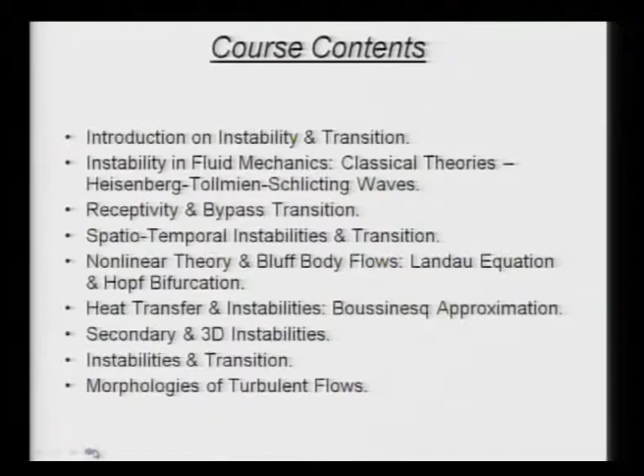The historical introduction we've been discussing: following the experimental observation of Reynolds, which was triggered by Stokes' observation that he could not get pipe flow calculations to match experiments, Reynolds in his pipe flow experiments showed that small ambient disturbances actually magnify, leading the settled laminar flow to go from laminar state to turbulent state. The whole idea of that experiment will be revealed to us later.

Let us now talk about the other aspects: the whole stability study was started with the mistaken belief that viscous action, if present, only damps the disturbances. This was essentially the idea of Kelvin and Rayleigh. This was settled after a lot of jousting between various groups from Germany and continental Europe and the UK, and finally settled by experimental observations at NBS Washington by Dryden's group.

We concluded that it established the existence of wavy disturbance flow at the onset, which we called Heisenberg-Tollmien-Schlichting waves, or HTS waves, obtained by linearized stability theory for a parallel flow. That is the catch.

However, when the same theory was applied to pipe flow, channel flow and Couette flows, it was seen that these are unconditionally stable for all parameter values. So people started looking at alternate explanations, suspecting this could be due to the nonlinearity of the instability regime, or that we had used the assumption that the streamlines are parallel.

That could be at fault. So basically we have to include the growth of the boundary layer into account - that is what we mean by non-parallelism - and of course, we may have some other unknown mechanisms.

What he observed was that the flow itself has a property called receptivity - it is receptive to certain classes of disturbances, not receptive to all kinds of disturbances. So receptivity is what was proposed, as opposed to the general theory of stability, which is posed as an eigenvalue problem.

In all eigenvalue problems, you do not need to define what the disturbance is - you have a homogeneous differential equation and homogeneous boundary conditions. So you have no way of putting in the information that there is some definitive input. This is the beginning of a dynamical approach to the study of stability through receptivity analysis.

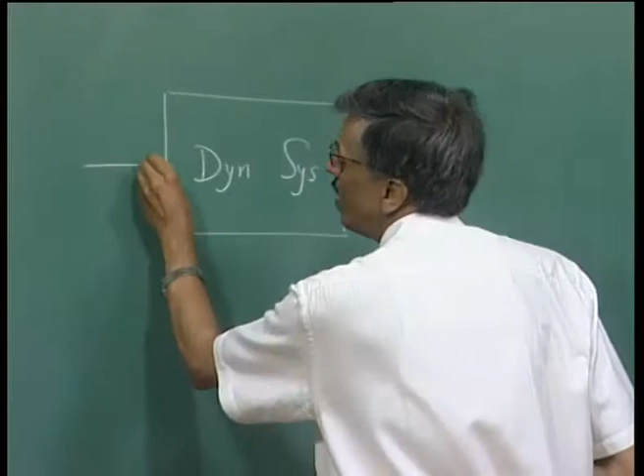In receptivity analysis, what you do is look at the dynamical system acted upon by some input, which leads to observable outputs. Receptivity is the property of this dynamical system.

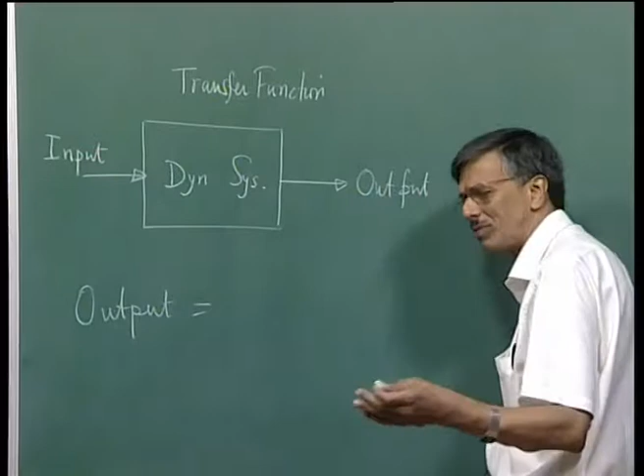Receptivity is the property of the dynamical system, and this property is what we call the transfer function. In a sense, the output is nothing but a convolution of the transfer function times the input.

This is important, because as long as we cannot include what is causing the perceptible disturbances, the picture remains incomplete, and this is what Morkovin was suggesting we should talk about.

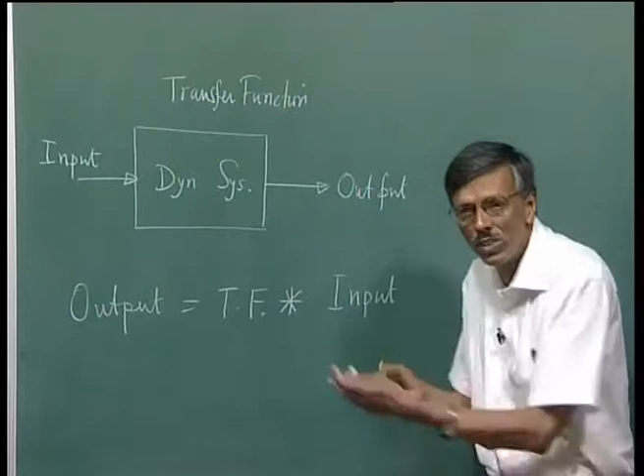So if this transfer function is not receptive to that class of disturbances, then even in the presence of that input, nothing is going to happen. This is rather important, because when Schubauer and Skramstad in their tunnel experiment tried to excite those waves by acoustics, they were not successful.

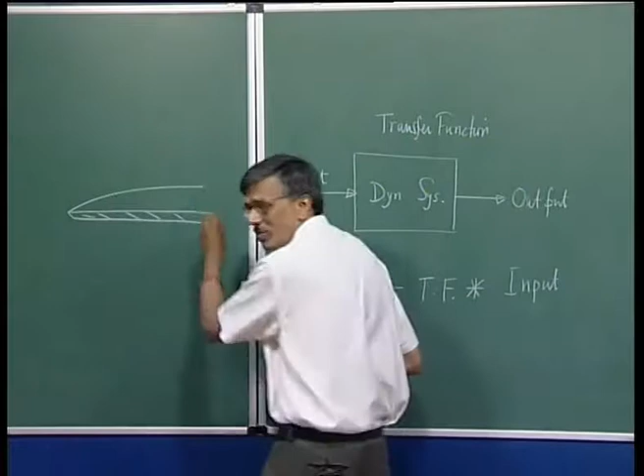Then they used a kind of vibrating ribbon. What they did was the following: if you have a flow past a flat plate, the boundary layer grows like this, and they put in a vibrating ribbon close to the boundary, then started vibrating it. This is what you may call the vibrating ribbon.

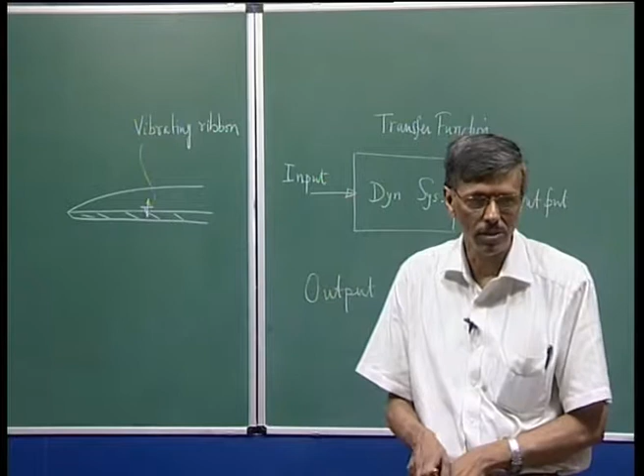This was made of bronze, and it vibrated at a specific frequency, which was actually used in Tollmien and Schlichting's calculation. We talked about in the last class that G.I. Taylor also wanted to do some experiments. What G.I. Taylor did was this: you have a plate, and then you put in a kind of a vibrating bump.

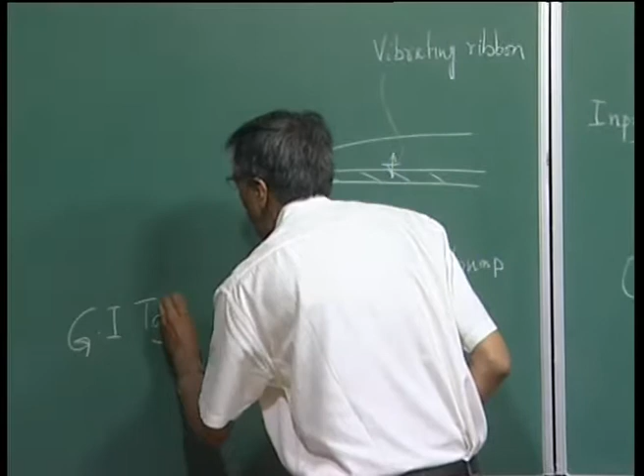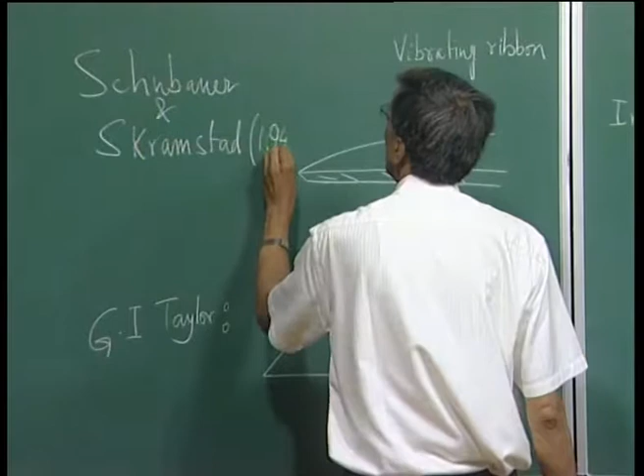This is like a circular patch, flexible, which goes up and down, and this was the experiment conducted by G.I. Taylor in the 30s, early to mid 30s. And this was the experiment done by Schubauer and Skramstad. This was published in 1947, but it was done long time before. It remained classified during the war years, and it got published afterwards.

So this vibrating ribbon was excited at frequencies of, let us say, 50 to a few hundred hertz, whereas in this case, this was vibrated at 2 to 5 hertz. So this could not produce a Tollmien-Schlichting wave, but this could.

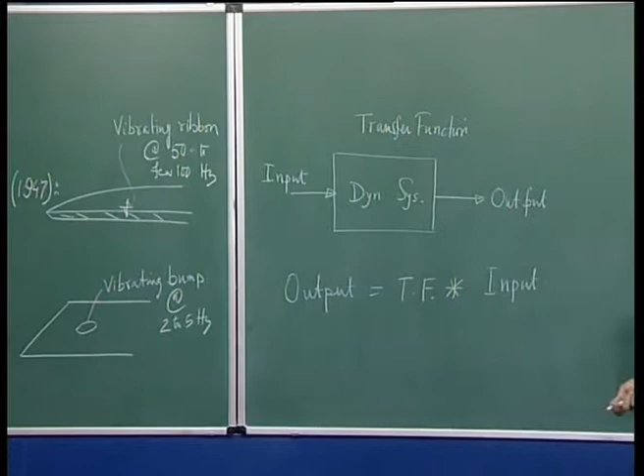The reason is the eigenvalue calculations of Schlichting did show that the flow is not receptive at low frequencies of this kind, but they are indeed receptive to this frequency, and this was something that one needs to do. In experiments, you just do not simply do a qualitative experiment and then make a value judgment.

So we understand. Although I must tell you that G.I. Taylor was an outstanding fluid dynamicist of his time. It is said that he never took any sponsored project. He used to do science for its own sake, using his own money and resource, and he was a professor at Cambridge. So he never did any sponsored research. He used to do it for the love of the subject, but at the same time, even a person of that caliber can sometimes take a wrong step, and here is an example.

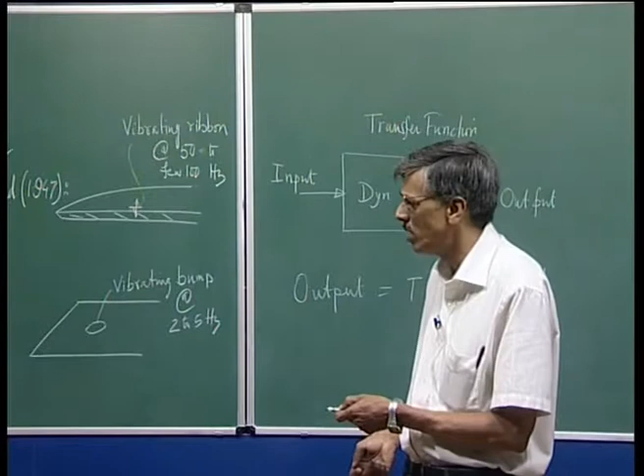So this was something that was very good, that Morkovin suggested that we should look at the receptivity approach. So we need to understand the transfer function very clearly. Stability theory only looks at the transfer function, whereas receptivity studies look at the full thing, because that also includes the information of the input.

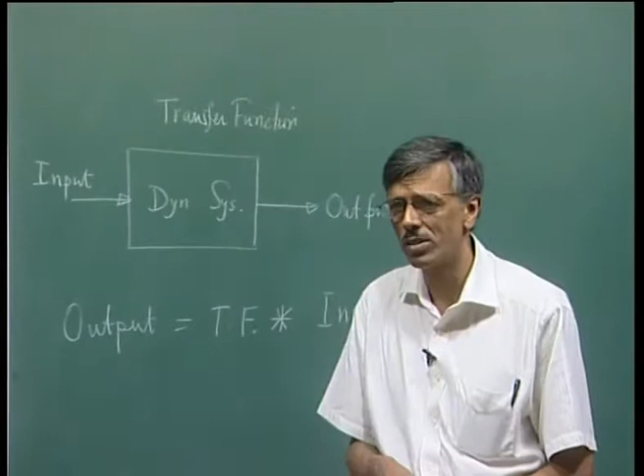We mentioned that there were some flows, like Couette flows, pipe flows, which do not show linear instability. So what happened is some researchers commented that those flows actually undergo transition because they suffer transient energy growth via some modes, which they call non-normal. We will go through these details.

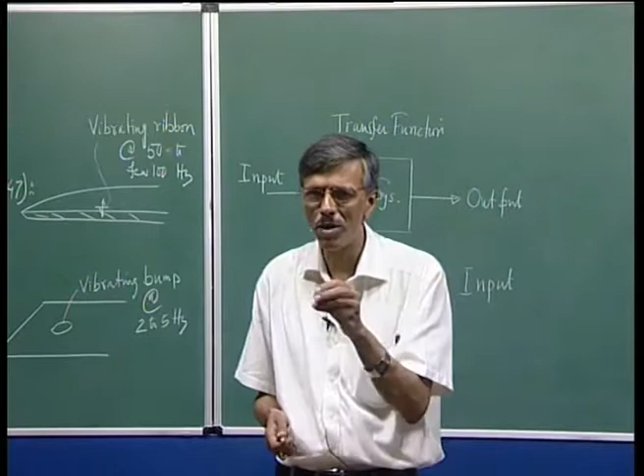The eigenvalue analysis looks at one frequency or one wave number at a time. So those individual frequencies or wave numbers are called normal modes. So here these people are talking about some kind of energy growth, not growing like a wave, but growing in time, okay? And that is transient. It just grows and then it is not there.

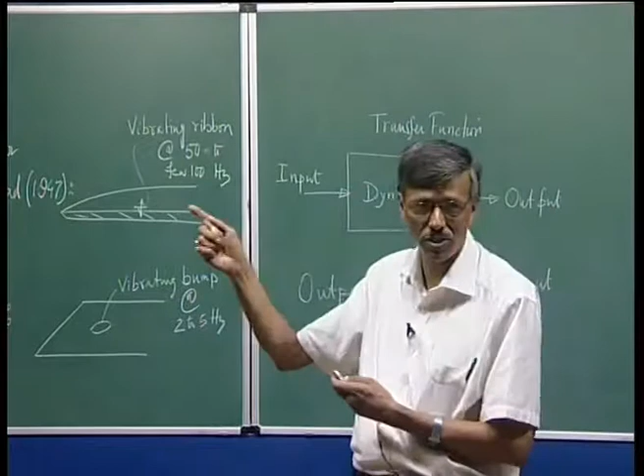I mean, it directly takes the flow from laminar to turbulent state. So it is not like a gradual growth that you associate with the Heisenberg-Tollmien-Schlichting wave transition route. Maybe this is an attempt to explain one particular type of bypass transition. We define bypass transition as that transition which bypasses the wave and its growth. So this was that, and this is the view proposed by Trefethen and his colleagues in this paper.

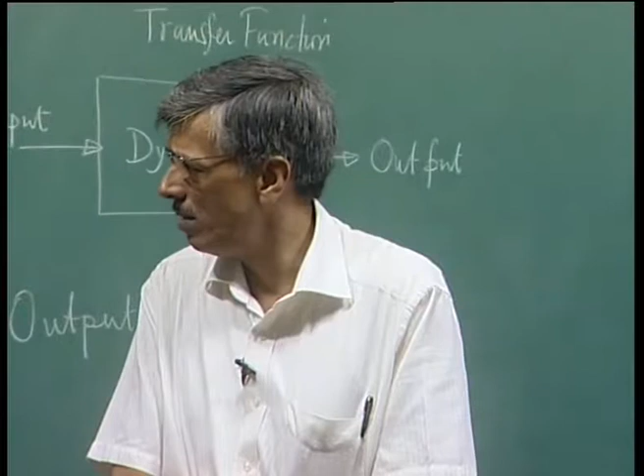And there were other attempts by Landahl, where he and his colleagues talked about algebraic growth of disturbances and interaction of different types of instability modes, etc. We'll talk about this.

Now, we also note that some researchers identify that you get fully developed turbulent flow due to some kind of self-sustained instabilities. Means what? You do not have to do anything, it will just become unstable, it will grow, become turbulent, then it may decay, but then again another set of disturbances will pick up. So that process is self-sustained. And they said that during this process you create some kind of distinct structure, which has been called coherent structure. It is like, think of eddies, vortices. So they are talking about some vortices or eddies forming, and those are what are called the coherent structures. They have been seen actually in various experiments.

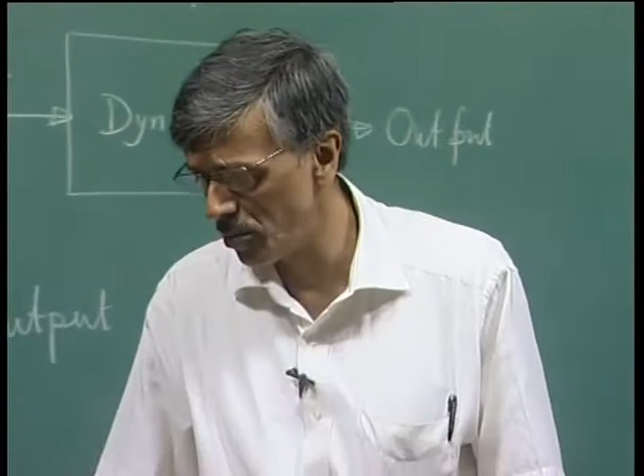Some theoretical analysis done by proper orthogonal decomposition or wavelet analysis also shows presence of coherent structures. So this is precisely the status now. We are in a time where we see there are possibilities that transition takes place through growth of waves, or you can have bypass transition, and bypass transition is basically a basket—it has many routes. We have talked about a couple of them: one was transient energy growth, another was algebraic growth of disturbances. There could be multiple instability modes interacting, and those also need not necessarily show you waves.

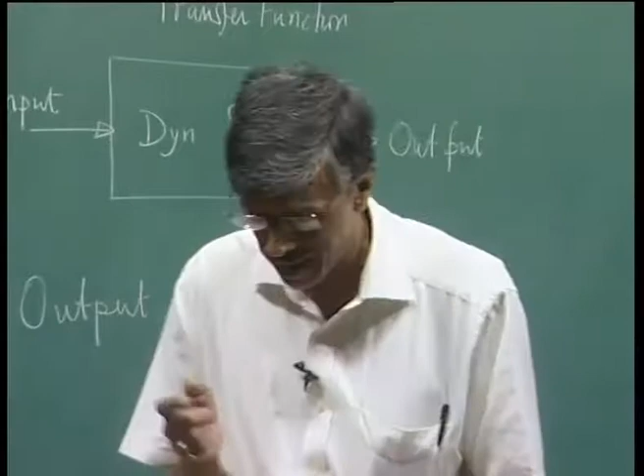But let me add at this point that this experiment we talked about was a very specially designed experiment, and this ribbon was excited at a fixed frequency. So what are we doing? We are creating a monochromatic wave, and we see some kind of waves that grow downstream.

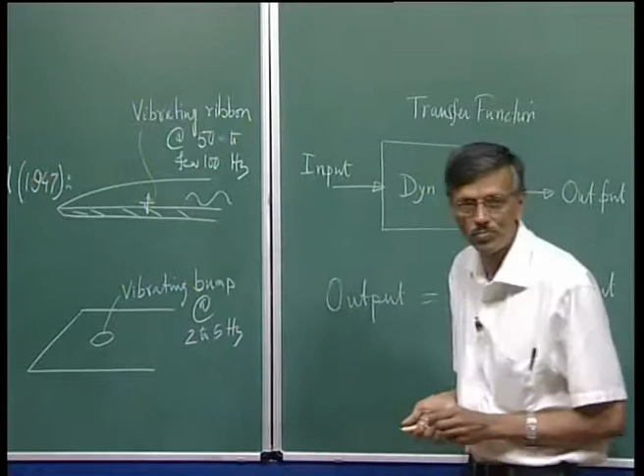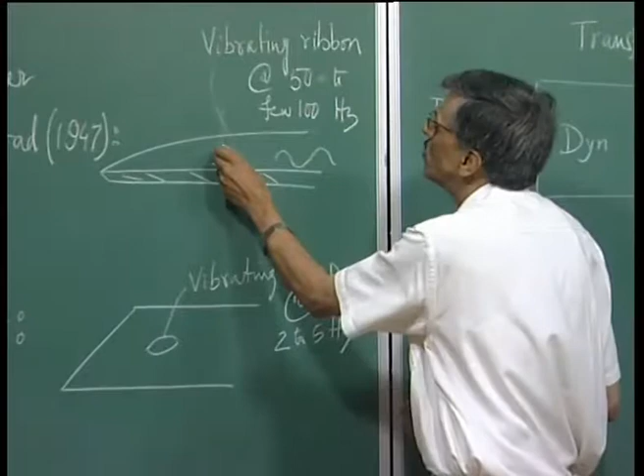Now, what happens in the immediate vicinity of the exciter was not talked about a great deal before the 1990s. People used to think that is not important. Even in some books or monographs, they erroneously show as if there is nothing up to here, and all of a sudden you start getting finite waves growing. That is a wrong picture. In fluid flow, especially at low speed, you cannot have such discontinuities—you will see it has to be a smoothly growing solution.

In fact, when we first did all these receptivity calculations, we identified two distinct components of those solutions. One we call the near field, which is in the immediate neighborhood of the exciter where we are exciting the flow, and a far field. In the far field you see those waves, the TS waves we talked about, but in the near field you may see some kind of totally different structure. We will talk about it in greater detail. So this is the picture that we see.

Now let us go through the formal description of the subject through this introduction. What we see as instability in fluid dynamical flows is always there—that is why we say they are ubiquitous, and even today they remain a challenge because we still do not completely understand transition and turbulence. We understand bits and pieces, and we are going to do that. However, we will try to integrate the whole thing together, and as you can see, you have a laminar flow, then a transitional flow, and then a turbulent flow. In this course we will try to go from the laminar flow side to that side.

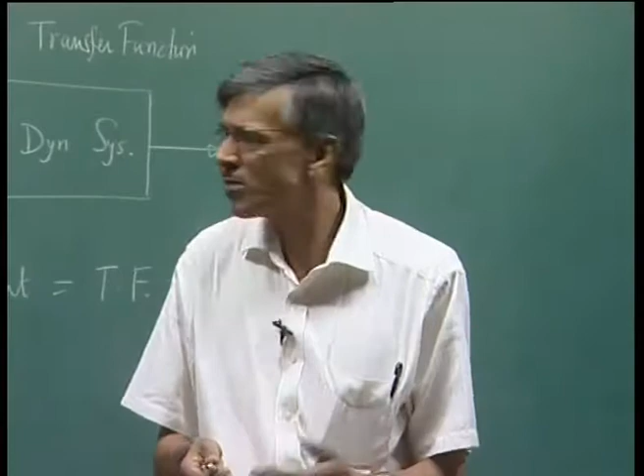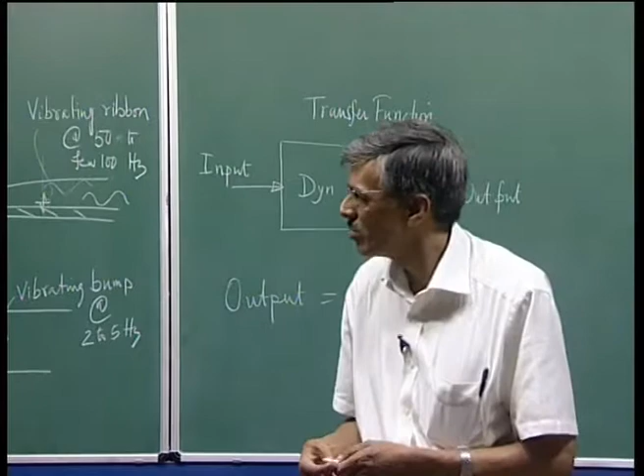We will not put the cart before the horse. We will not talk about turbulence and then make some assumption. Most of the time, people who spend their effort studying turbulence, at the back of their mind, think about some kind of universality of turbulence. What it means is, irrespective of whatever input you have, the eventual output you will get is only one turbulence, one kind of turbulence. Although they describe it not in a deterministic manner but in a stochastic fashion, they say that even in a stochastic picture you have a universality, which is debatable and which some of us do not agree with. So what we do instead is go from the laminar flow side: first it becomes unstable in a primary mode, then you could have a secondary instability, then tertiary instability, then nonlinear stages, and then fully blown turbulence. So that is what we are talking about.

So for pure fluid dynamical flow, we are saying instabilities are everywhere, but if you add some additional physical effects into it—for example heat transfer or chemical reaction, as you may see in an engine—those also suffer instabilities, and those instabilities are going to be even more complicated. So we will probably spend some time talking about heat transfer. Chemical reaction we are not going to discuss at all.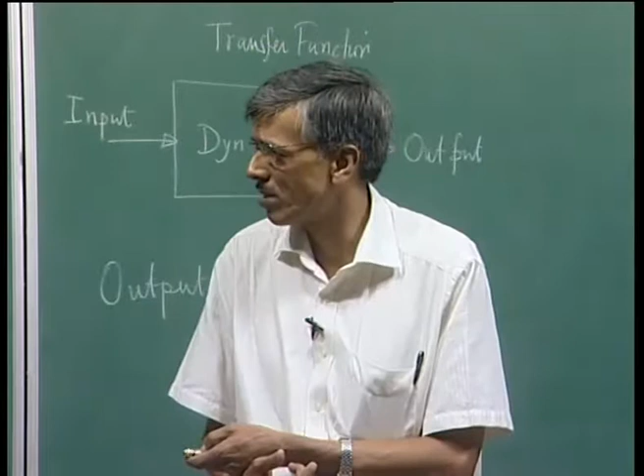And of course, we are going to emphasize various theoretical computational developments. We will talk about experimental results, how experiments have to be designed.

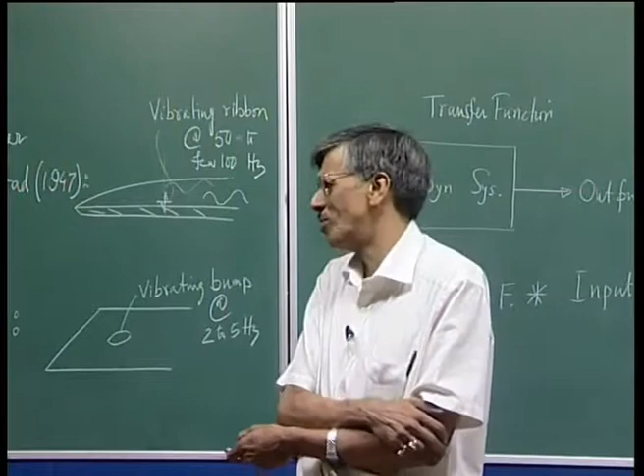Let us talk about one of the applications that should motivate most of you, where this understanding of flow transition is very, very crucial. For example, we are talking about modern day aircraft, where we basically want to keep the flow laminar as long as possible. Why? Because of the reason that if I plot...

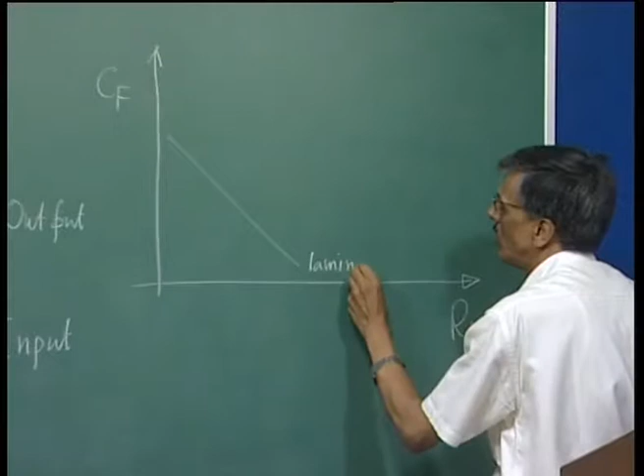Let us say the drag, or one component of it, the skin friction, versus Reynolds number. We know even for flow past a flat plate, the laminar flow, if I do it in a log-log scale, goes like this. So this is the Cf versus Reynolds number for laminar flow, and then depending on the kind of disturbance that you have, it actually goes on to a turbulent branch. So the way the transition process takes place depends on the background disturbances, and it connects like this, it connects like this, depending on different levels of disturbances.

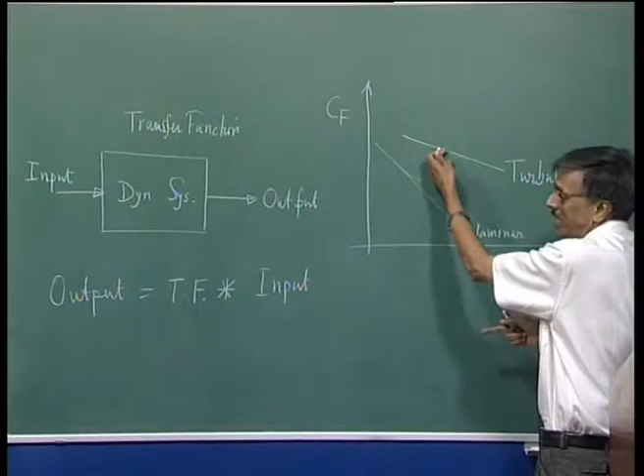That is why the receptivity factor comes in. Where would you continue up to this laminar flow? It depends on how you control the disturbance environment. If you can control it well, then instead of flow becoming turbulent here, you can delay it and it can happen later. And you can see that we are talking about a log scale.

So, if I look at a position, then I can see for laminar flow the skin friction is here, and for the corresponding turbulent flow, if it is fully developed turbulent flow, it is there. This difference is quite significant. We will give you an example - you find that this is significantly higher. So one of the goals for any good aircraft designer would be to keep the flow laminar as far as possible.

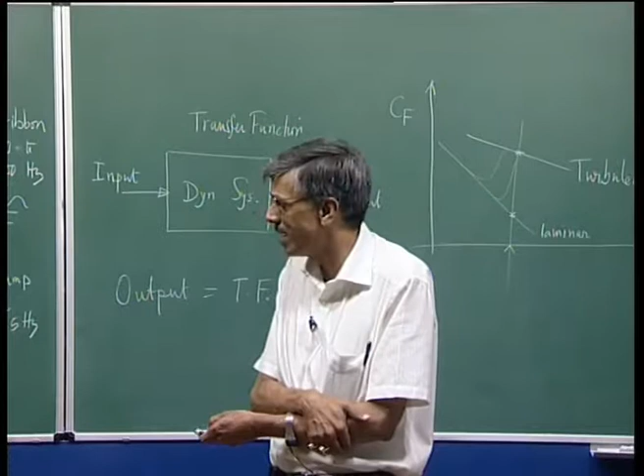And there is a technology which is called natural laminar flow technology, which tries to alter the wing geometry such that you can control the transition process. So those wings are called NLF wings, or natural laminar flow wings, and you understand also that in designing those wings, we are not...

...depending upon active devices. Why not? Because for active devices, if they do not work, then we will be in deep trouble operationally. Think of that you have designed an aircraft thinking the flow will be laminar. So you have put in some engine, and then up there in the sky while it is flying, your active device fails and flow becomes turbulent, and the engine does not have sufficient power. Then your flight is in jeopardy.

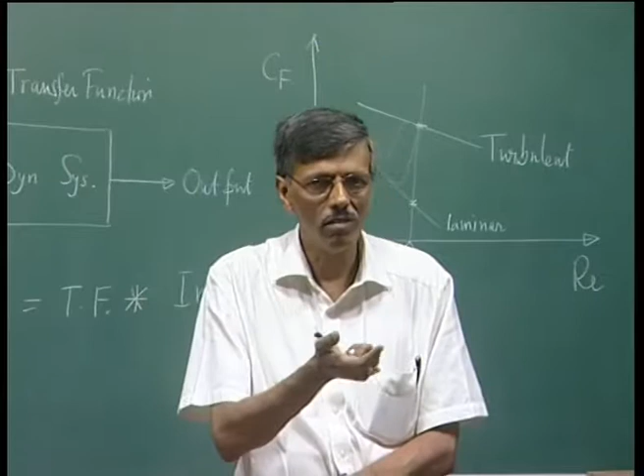And as I told you, apart from the fuselage, most of the aircraft actually experiences drag that is due to skin friction, the viscous action - it is not as much due to the pressure component. We have two components of drag: skin friction drag and pressure drag. It is the fuselage actually that gives a significant amount of pressure drag. I will give you an estimate, so you will see that estimate.

So you can actually think of reducing the wing drag by 10 to 12%, and that is quite significant. Empennages are those control surfaces - the horizontal stabilizer and the vertical stabilizer - they are also wing-like bodies. So you could basically keep the flow laminar over those also. Whatever works in the wing would also work in the horizontal and vertical stabilizer. In addition, you could also keep part of the flow over this nacelle, which houses the engine, laminar, and there you can think of getting a 1% reduction in drag.

It is quite possible to do that, but notice this aircraft's wing is swept back, making some angle with the fuselage direction. Swept back wings are not too amenable for keeping the flow laminar. That becomes better if you have a smaller sweep back angle. That is why many aircraft designers would not like to have the sweep back too large. A rule of thumb is try to keep your sweep back angle less than or equal to 20 degrees. Why do we need sweep back?

Most of these aircrafts fly at about Mach 0.8. So if the aircraft is moving at about Mach 0.8, in some part of the wing you could get a shock. The good news is if you can keep the flow laminar and design the contour in such a way, that also helps in controlling the shock.

Those are called supercritical wings, designed for keeping the shock weak. It so happens that what works for supercriticality also works for natural laminar flow. All these modern aircrafts like A340 or Boeing 757, 767 and higher models, they all have NLF wings, which are also supercritical wings. So you try to push the frontier, go as high as possible in Mach number, and to avoid shock forming, you have to provide the sweep back.

So what matters most is the Mach number normal to the leading edge, not parallel to the fuselage. That is why you sweep it back, so that the Mach number normal to the wing becomes lower. That is the whole idea.

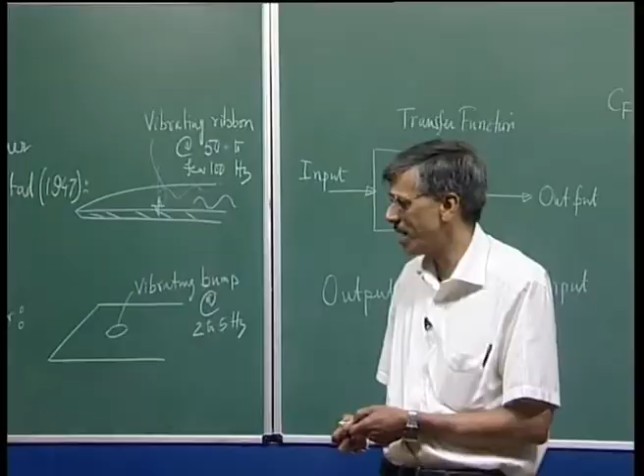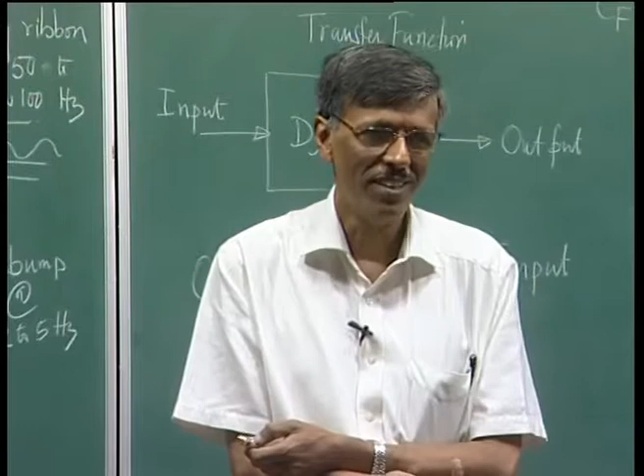Now if you are trying to design a new aircraft, these are the problem areas. Even today, we do not predict transition very well. We simply do not, and even if we do, the predictions are not very reliable. And if prediction is a problem, experiment is virtually impossible, simply because every wind tunnel brings its own signature. You take the same aircraft model and do experiment in two different tunnels, you will find a very disappointing result, because they will be all different.

So this is what we try to keep in mind as we go along. We are going to look at how things work, and this is an example of a beautiful design. I am not very sure if it is still out yet, it was supposed to have been inaugurated this year. This is an aircraft designed by Honda, and unlike any other aircraft, the surface finish of this aircraft is superb. This has happened because the automobile sector has better manufacturing ability than what we do in making airframes. If you come close to an aircraft, you see those rivets and gaps, they look very ugly, and they also actually create a big potential for transition.

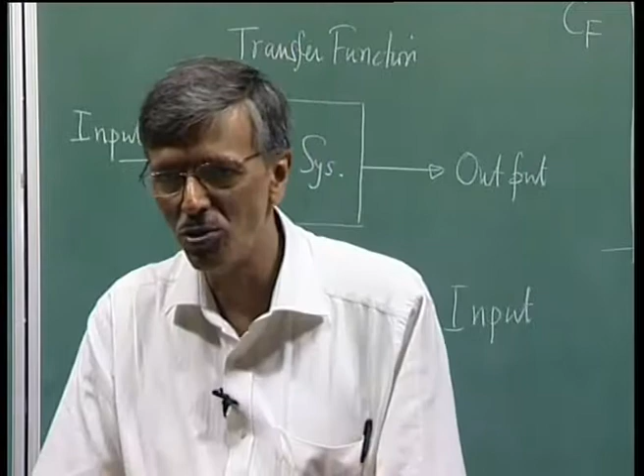Whereas these people have designed the wing as an NLF wing. Honda, I will show you some clip today itself. And not only that, they have also positioned the nacelle with respect to the fuselage in such a way, it is a beautiful design, because if you calculate the drag of the nacelle, calculate the drag of the fuselage, add the two up together, and then go to the tunnel and do the experiment with the fuselage and nacelle together, that total drag is lesser than the sum. So this is what is called synergy in design.

So this is one of the most beautiful aircraft that has been designed. We have studied it to some extent. I will show you some of the work done by Yogesh here, and you will see some of those calculations.

So, you can see it is the fuselage which actually contributes more drag than even the wing. Then the stabilizer gives you a drag of the order of 0.0027, roughly about half of what you get from the wing. So, it is not negligible.

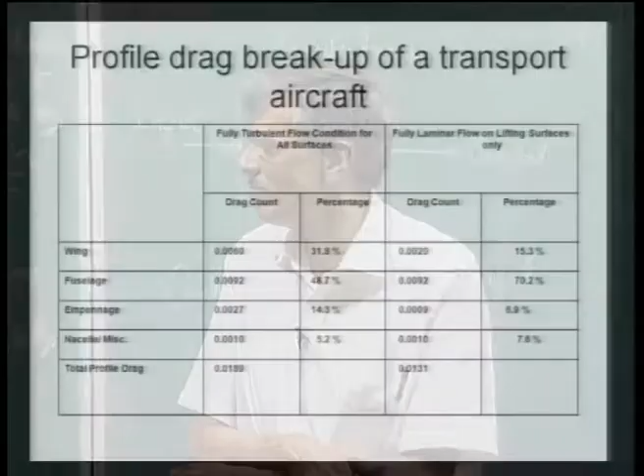Now, if I show you that picture for the Airbus A340, suppose we manage to keep the flow fully laminar on all lifting surfaces, not part - just the wing and the empennages, nothing else. If we can keep that, then you see the drag of the wing would come down from 0.006 to 0.002, that is 1/3 the value, as shown here.

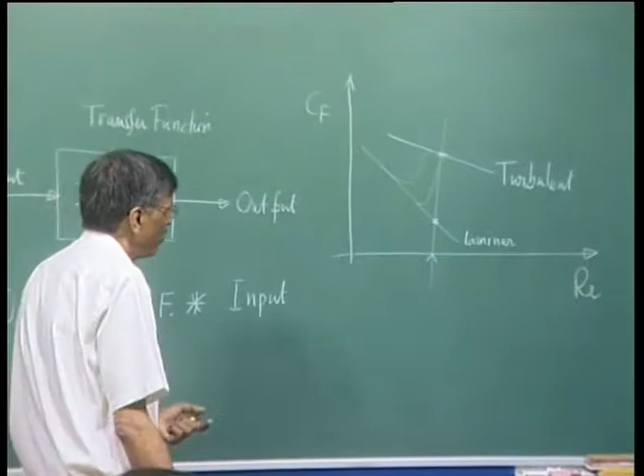Actually this jump for a flat plate is about 5 to 10 times. So you try to keep the flow laminar as far as possible, and further you keep it, you can see the dramatic growth. Suppose it becomes turbulent here, then this differential is not very much, but if you can keep it laminar, you can actually get a very significant reduction in drag. So the drag becomes 1/3 for the wing.

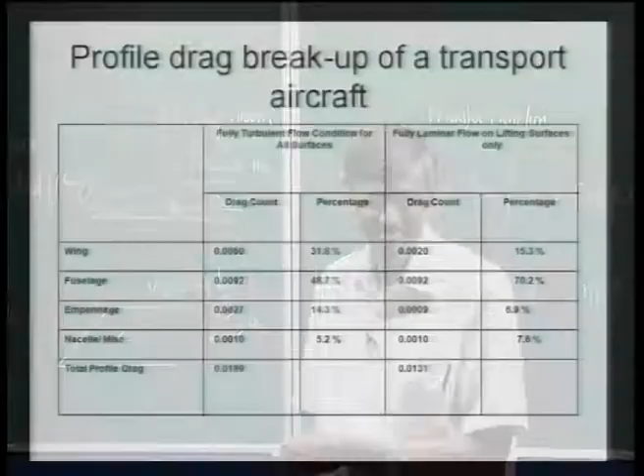Now, the fuselage of course remains the same at 0.0092, and the empennages also become almost 1/3, with other things kept as they are. So you see the drag has reduced from 0.0189 to 0.0131. Now, the wing contributes about 15% of the drag, but the fuselage contribution has gone up to 70%, and the empennages have also come down, and the nacelle has also come down.

However, we have seen in that picture what the current thinking in Europe is, that you are not going to get fully laminar flow over the whole lifting surface, you are going to get part of it. So this is an optimistic picture of what would happen if you could do that.

So let's talk about the flow over a nacelle. Now there also people have done something. You see, what really matters is the pressure gradient in the flow. If I simply take a cylindrical nacelle, its pressure distribution is given like this - you have a suction peak here, and following the suction peak, you have a severe deceleration of the flow.

Adverse pressure gradient is very, very large in this part. That actually triggers transition immediately. So one rule of thumb is avoid adverse pressure gradient as much as possible. If you guys are aware of this NACA 5-digit series and 6-digit series aerofoils, those are designed with this in mind.

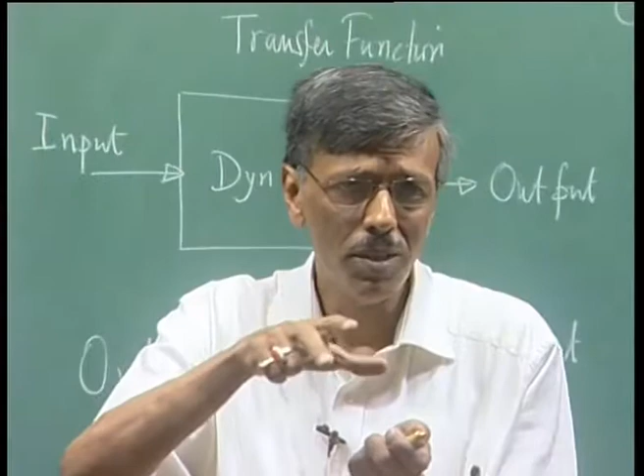They knew you have to keep the flow under favorable pressure gradient as long as possible, and one theme in the development of those aerofoil sections in the 1920s and 30s was to keep the maximum thickness point as aft as possible. They pushed the maximum thickness point to say 35% to 50% and so on. That is the story of 6-digit series aerofoils.

So here also you can do the same thing. Now you can see the contouring - instead of having a flat diameter, now it has been increased, and if you are looking at flow less than Mach number 1, then such a contour would create a flow acceleration up to the maximum thickness point. So you get a very smooth CP distribution as compared to this peaky CP distribution.

So this is one of the ways people have been talking about reduction of drag over the nacelle, and we have already said it accounts for about 5 to 8%. So whatever you get, it is good enough. Somebody said sometime ago that if you can reduce drag by 1%, the operational cost comes down by a few billion dollars.

We just saw that for an aircraft like Airbus, people are talking about some amount of drag reduction by promoting laminar flow, but we also saw the Honda Jet, which looks gleaming and which has a very fantastic drag polar, which is very good.

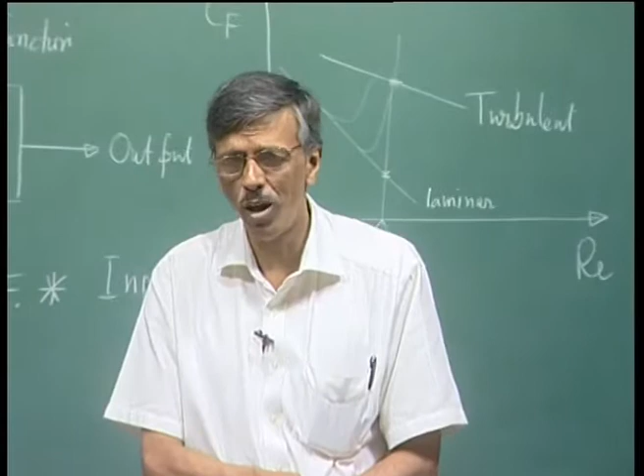I told you about surface finish. Now, surface finish is not something that you only see with your naked eyes. Sometimes you would also worry about the roughness, which you can only measure using profilometers. So, the effect of even small scale roughness could be very profound, and people have known about it, and this effect of roughness is a function of Reynolds number.

You see all those NACA 6-digit series aerofoils which are designed, they somehow work for gliders, but they do not work for powered aircraft. Why? Because unpowered aircraft go at a smaller speed, so Reynolds numbers are lower, of the order of a few hundred thousand, whereas if you look at that business jet we saw, Honda Jet, the cruise Reynolds number is something like 10.3 million. The aircraft in our flight lab would also have a cruise Reynolds number of the order of a few millions, if not 10.

So, at those high Reynolds numbers, the small roughnesses act like an amplifier. They really promote turbulence. So, the effect of roughness on airfoil section is quite well known. That is why 6-digit series aerofoils are not used in any commercial aircraft that you would see. They have major effects on lift, drag and bypass transition near the trailing edge.

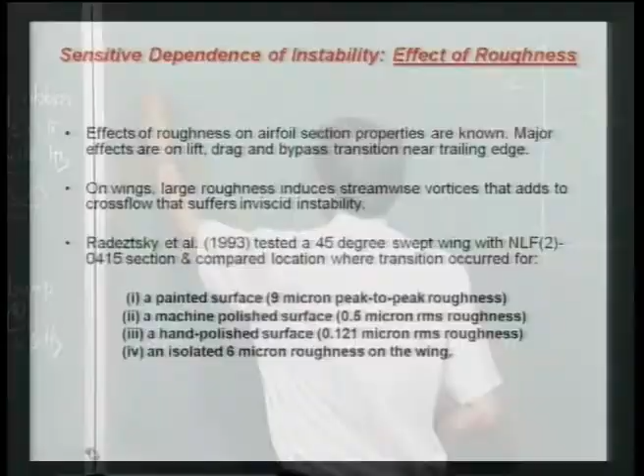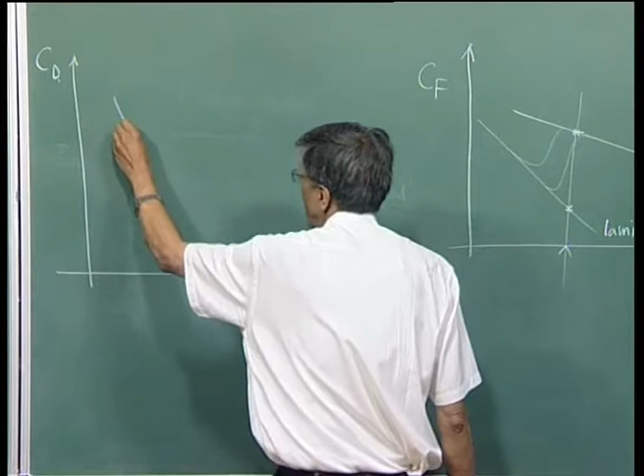Let me tell you somewhat about the property of these natural laminar flow aerofoils. They have the following property: if I plot the section property, I will plot non-dimensional lift coefficient on this side, and on this side I will plot the non-dimensional drag coefficient, and these NLF aerofoils, or the 6-digit series aerofoils designed in the 20s and 30s, have the following type of properties.

So, what happens is you design it for, say, a point here. So, this is your design point. At the design point, your drag is quite nice. This could be your cruise configuration, but suppose when you are landing or taking off, or if there is some other off-design condition, you can see that if you are here, then this drag and this drag are quite different, and roughness actually changes this curve altogether.

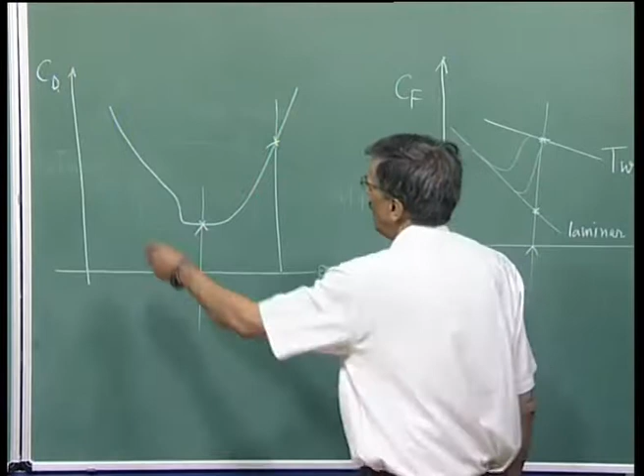If you have roughness, you could see that this could actually go like this. So, this is what is called a drag bucket. Most of those 6-digit series aerofoils have a drag bucket; the drag polar looks like a bucket. So, if you are working in this region, it is all very fine. Outside that region, drag increases very, very badly. So, that is why it was done.

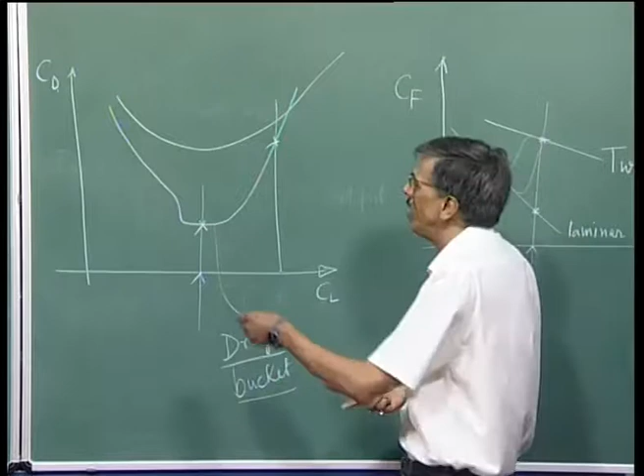Whereas the modern day NLF aerofoils would be somewhat something like this. So, it is not a single point design, it is a multi point design. You try to design it not only for cruise configuration, but also for, let us say, landing and takeoff and so on. However, we have seen that this rapid increase in drag is contributed by roughness for those 6-digit series aerofoils.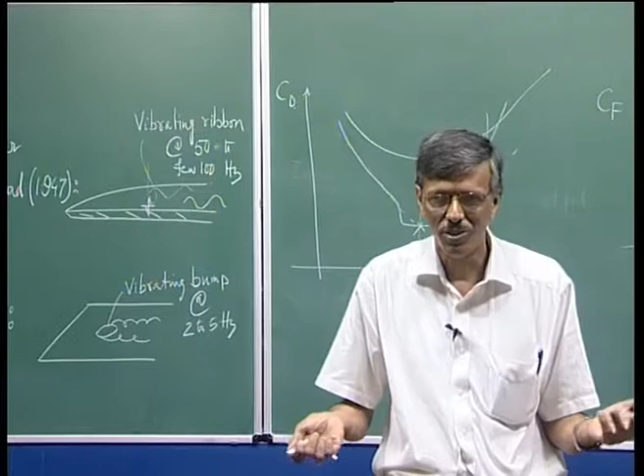And what it actually does, this roughness element, where it sits, it is almost like a bump, and it creates some kind of streamwise vortices - vortices which are like helical structures in the streamwise direction. These streamwise vortices actually create an instability called the cross flow instability, and it is basically inviscid in nature. So, you have no way of controlling it. Inviscid mechanisms - these vortices create some kind of inviscid instability, and they are going to trigger transition immediately. So, that is why you try to avoid having roughnesses.

This was investigated by a group, Radeztsky and his co-authors, who actually tested a 45 degree swept wing with a particular natural laminar flow section. This is what is called the general aviation wing, GAW wing, with the number code 0415. This is a 15% thick aerofoil, and they compared the location where transition occurred for the following four cases. You take a painted surface.

One would probably think painting makes the surface smoother, but despite that, if you look at peak to peak roughness height, it is of the order of 9 micron. 9 micron is not too large, but even from a transition point of view they could be disastrous.

Now, you could also machine polish the surface. You can bring down the peak to peak roughness from 9 micron to 0.5 micron RMS value. So you can bring it down, but what works best is the individual ability to do it by hand.

A hand polished surface actually brings down the roughness height to even lower values. And they also studied something like a bump, a 6 micron isolated roughness element. And what you would notice is...

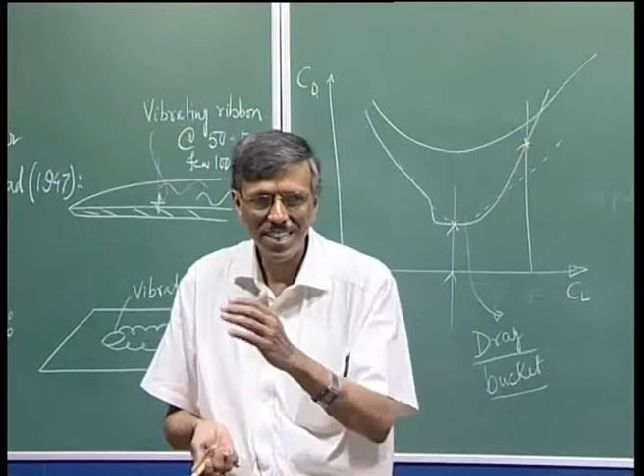So you can see these three are somewhat different, and although there is a problem with hand polishing, you can polish it better where the curvature is less. If you try to look near the stagnation point, near the leading edge, the polishing may not be as good. It would be slightly degraded, but still better than machine polishing.

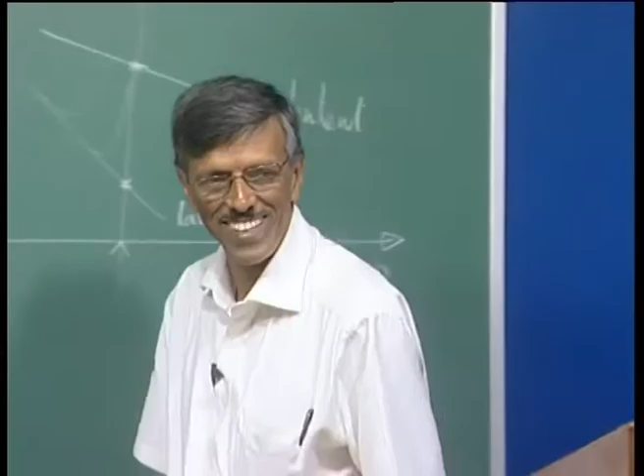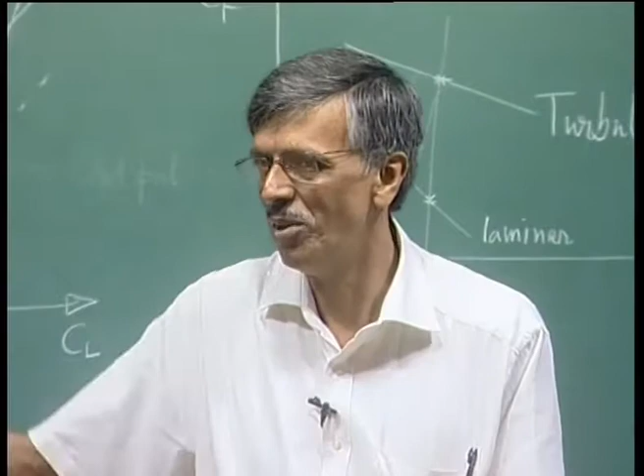And what do we do when we do calculations? We always calculate uniform flow past a smooth surface. So you understand why we do not do so well when it comes to computing also, because we do not have the wherewithal to put this input into our computations. Surely some of us try to do it, but the rest, especially commercial packages, have no way of really even comprehending this problem.

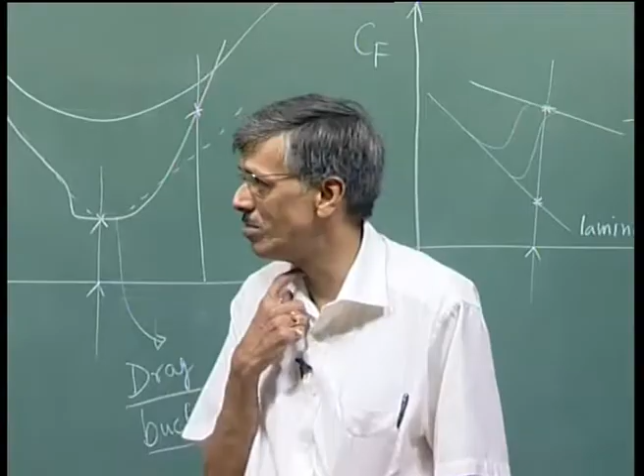Okay, so we understand what it is. So if I summarize the effect of roughness: isolated roughness, like what we have shown here, induces a 3-dimensional effect via streamwise vorticity, and the streamwise vortices create an inviscid instability. You can prevent transition occurring early via cross flow instability if you remove this isolated roughness by proper surface finish.

And hand polishing can really create surface finish up to 0.1 micron near the mid chord region, and 0.25 near the attachment line. Attachment line is near the leading edge - there you have a curved surface, you cannot do better than that.

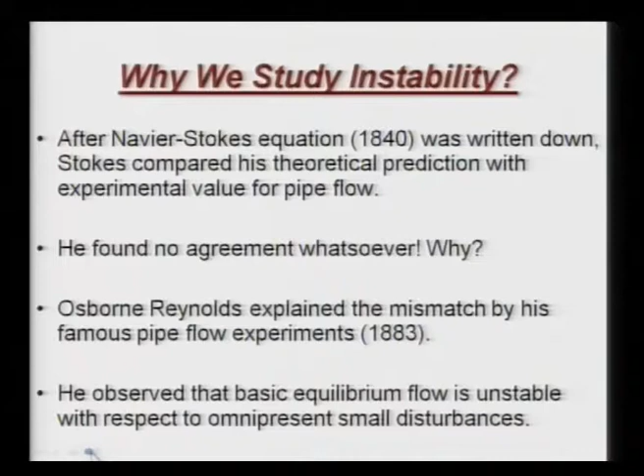Now, why do we study this? We have talked enough about it, so we know what we are talking about. But here I want to show you what Osborne Reynolds did. Osborne Reynolds performed his famous pipe flow experiments. He noticed that the basic equilibrium flow is unstable with respect to background disturbances. So let us see what he did in his experiment.

This is a sketch of his experimental facility, probably taken from some museum where it is displayed. And this is the pipe in the middle. I will show you a better sketch later, but do understand the pipe is here. The pipe entrance is through this bell mouth, so the bell mouth is visible.

And at the center of the bell mouth a dye is injected - this is where the dye is kept on top. And what happens is one notices the following scenario, sketched here on the right hand side: if the flow was completely laminar, the dye injected in the center would remain and go through the pipe.

But what actually happens is something like this: it remains laminar, then it breaks down to turbulent flow very rapidly, and this dye gets mixed up with the surrounding fluid. That is a signature of turbulence, the chaotic nature of the flow.

Sometimes, if you take some care, you do not immediately go to fully developed turbulent flow. Instead, you get something like this—these are called puffs, or slugs. You get a puff of disturbances going, like a smoke ring kind of thing that goes one after the other, and this is what you actually see in the experiment.

So this is what happens: in laminar flow, the dye does not diffuse, but if it becomes turbulent, you get this other behavior. Here is a case where the transition has occurred rapidly, and here it happens in a more delayed manner. So this part of the flow, starting from here till the end, we call transitional flow. This was the famous experiment.

If we recall what we see in the textbooks, it says that if you have a Reynolds number up to around 2300 or so, you can keep the flow laminar. Anything largely in excess of that Reynolds number, the flow becomes turbulent.

We have seen in the experiment of Reynolds that he could keep the flow laminar for a Reynolds number of 12,830, and he had to do all kinds of things to achieve that.

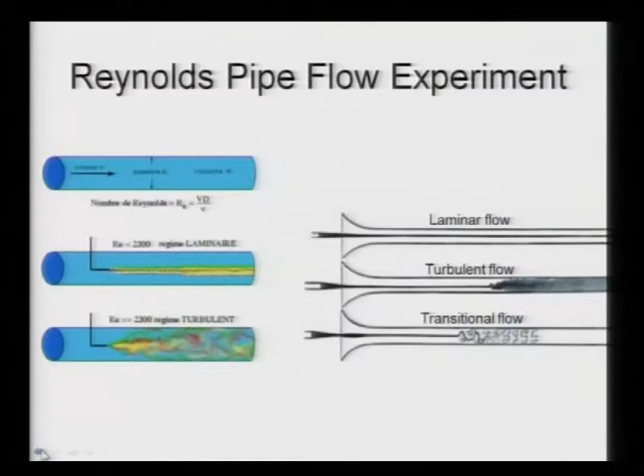One of the things we noticed is this bell mouth. What does it do? Again, it's incompressible flow—you are reducing the diameter, so you are imposing a favorable pressure gradient, or accelerating the flow. In the presence of a favorable pressure gradient, the strength of background disturbances comes down. That is how you do it.

Unfortunately, the lab where Professor Reynolds used to work in Manchester was next to a main road. Those days there were no automobiles, but there used to be horse-drawn coaches which gave rise to acoustic excitation. That is why he used to come back and do those experiments in the middle of the night, and he could keep the transitional Reynolds number as high as 12,830.

And this we are talking about the 1880s. Subsequently, Ekman did experiments—Ekman and Schiller—and they reported that they could delay the transition all the way up to a Reynolds number of 100,000.

So this is something we must keep in mind, that disturbance plays a major role. That is what we wrote: if you starve the input of disturbances, the corresponding effects will be milder. This is what we see.

So in summary of this experiment, we say that equilibrium flow, the laminar flow, if we have obtained it analytically, we only worry about two things: a mathematician always likes to think in terms of existence and uniqueness of the solution. But that story is not complete, because even if you have shown that a solution exists and is unique, you may not observe it in nature.

That is related to what Landau and Lifshitz said very clearly: the natural flow that you would see must not only follow the equations of fluid dynamics, but also be robust enough to withstand all those background disturbances. They have to be stable—only then will you notice that flow.

So this is at the heart of instability studies, and we said that Reynolds could keep his transition Reynolds number up to 12,830. That prompted him to say that the condition he could achieve is one of instability for disturbances of a certain magnitude.

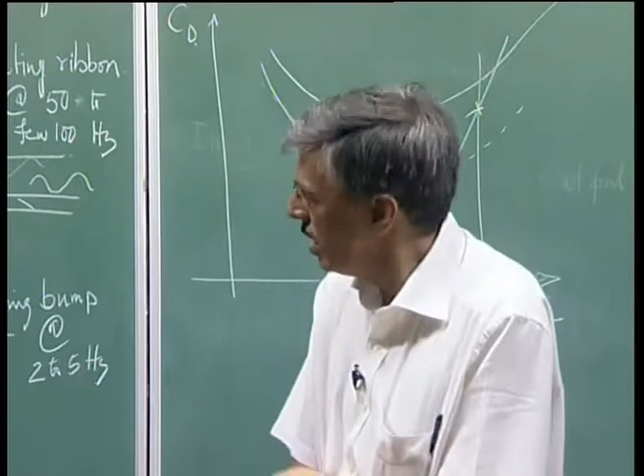And if the magnitude is lower, the flow is stable. If the magnitude is larger, it is unstable. So what is this? This is the nonlinear aspect, where the phenomenon depends on amplitude—that is nonlinear instability. This is something he could prophetically say, because subsequently, when linear theory came and people investigated, it was found to be stable.

So why does pipe flow become unstable? Reynolds himself gave this suggestion. Okay, I think we will stop here.